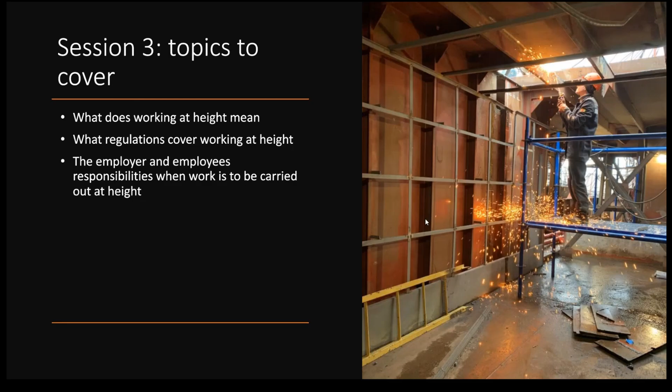So in this specific area, we will be looking at what does working at height mean? What regulations cover working at height? The employer and employee's responsibilities when work is to be carried out at height. Possible hazards and risks when working at height. How to control hazards and risks when working at height. Working on flat roofs and internal voids.

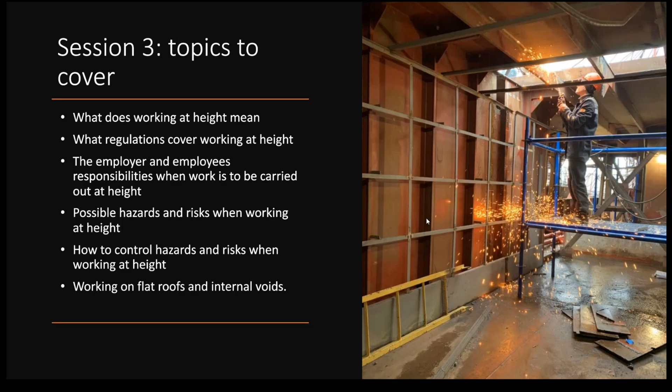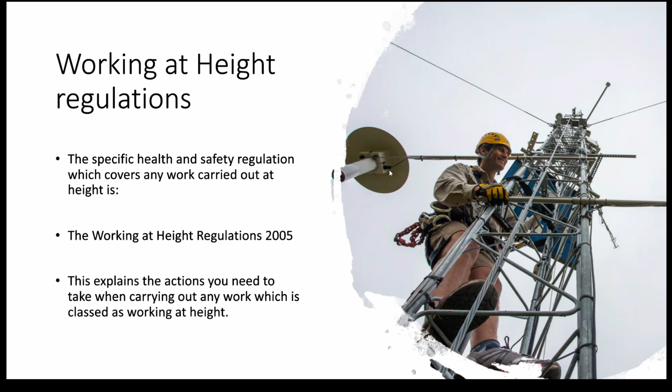So the specific health and safety regulation which covers any work carried out at height is the Working at Height Regulations 2005. This explains the actions you need to take when carrying out any work which is classed as working at height.

So what is classed as working at height? Working at height refers to any place where work is to be carried out, and if there were no safety precautions in place, you could fall a distance which could possibly cause you personal injury. So there isn't a specific measurement. It simply states that if you're working at a height, if there were no safety precautions in place and you fell, would you hurt yourself?

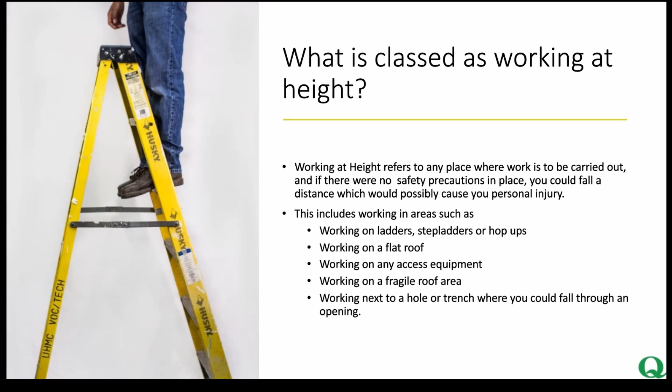This includes working areas such as ladders, step ladders, or hop-ups. Working on a flat roof. Working on any access equipment. Working on a fragile roof area. Working next to a hole or trench where you could fall through an opening. They are all classed as working at height.

Employer responsibilities relating to working at height. So the employer needs to make sure that when any work is to be carried out at height, it is planned properly so it's carried out safely. Supervised by experienced people. Any working at height is carried out by competent workers. Carried out using the correct type of access equipment. A risk assessment is carried out and control measures are put into place. The employer needs to do what they can to prevent anyone from falling.

So if you look at the image there on the left hand side, this guy has a harness. He's attached at 2 points, so he's clipped to the side and at the rebar at the top there as well. He's also got safety glasses on, gloves and a hard hat, and wearing a high vis jacket there as well.

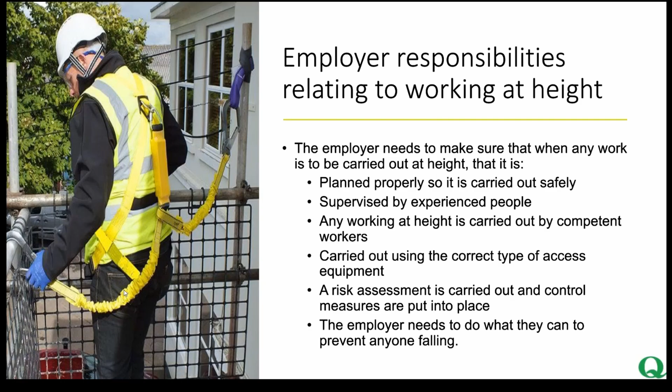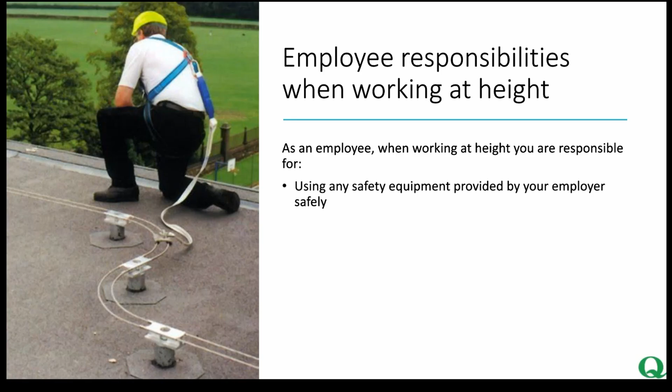Employee responsibilities when working at height. As an employee, when working at height, you are responsible for using any safety equipment provided by your employer safely. So if they provide you with a harness, as we can see in the picture there, you must wear it. If it says in the risk assessment and the method statement that to carry out that job safely you must wear a harness, therefore you must be wearing it.

Using the information gained from training and instructions to use safety equipment correctly. To follow all risk assessments and method statements. Reporting any safety hazards or unsafe working conditions to the appropriate person.

So if we think about working at height, things like the weather could have an impact. So if all of a sudden it starts to get windy, or that roof that you're working on has become slippy because it's raining, then it would be a good idea to notify your site supervisor or your site manager, because it could potentially mean that that surface is now unsafe to work on.

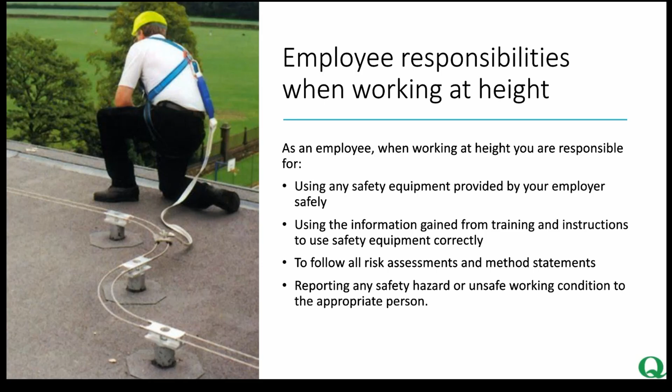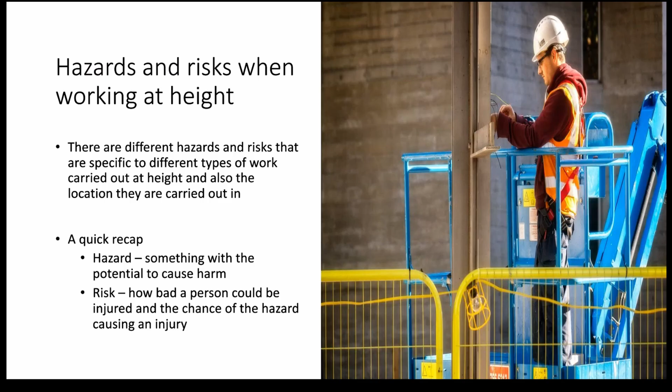So hazards and risks when working at height. There are different hazards and risks that are specific to different types of work carried out at height and also the location they are carried out in. So a quick recap. Remember, a hazard is something with a potential to cause harm. And a risk is how bad a person could be injured and the chance of the hazard causing an injury.

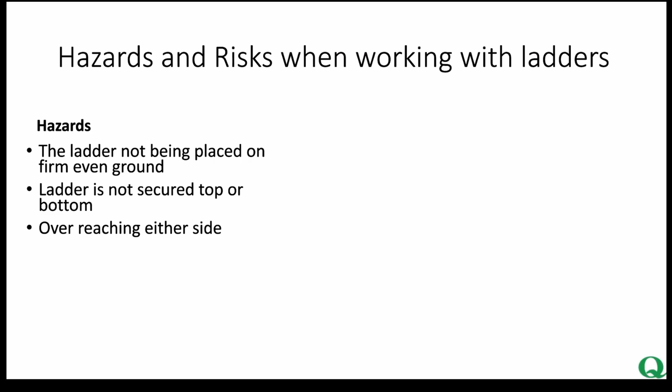So hazards and risks when working with a ladder. The hazards could be the ladder not being placed on firm, even ground. The ladder is not secured at the top or at the bottom. Overreaching on either side. Overreaching means if you are actually on the ladder and you're trying to reach for something that's just out of your grasp. Okay, that's overreaching.

Using a defective ladder. So is it the case that the rungs on the ladder are made out of wood and they're starting to corrode a little bit?

Using a ladder in high winds. Using near electric cables. Using tools and equipment. So if you're working at height and you're using tools and equipment, obviously the hazards are that they could either fall out of your tool belt or the case, or they could fall out of your hand, and they could strike somebody, a pedestrian that's underneath, or a colleague who's underneath as well.

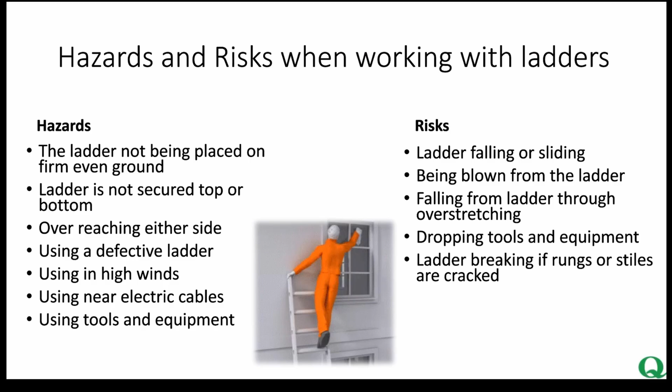Those risks: the ladder falling or sliding if it's on uneven ground. Being blown from the ladder if it's windy outside. Falling from the ladder through overstretching. So if you are overreaching on either side, you could fall from the ladder from overstretching. Dropping tools and equipment is the risk of using tools at height. The ladder breaking if the rungs or the stiles are cracked.

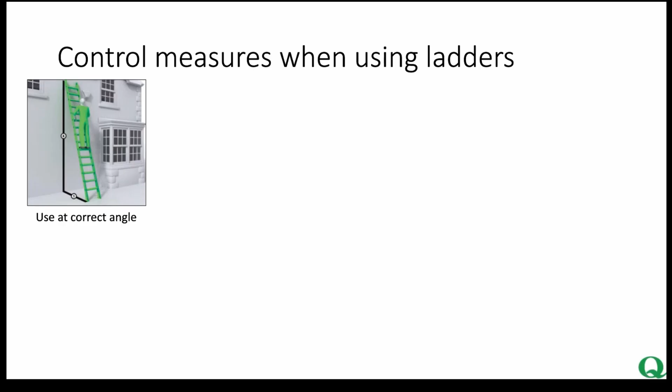So the control measures you could put into place to make sure that those ladders are safe to use. Use at a correct angle. Do not overstretch. Secure it where necessary. So use the ties at the base and at the top as well. Use standoffs. It would be a good idea to do some research and find out what the actual correct angle is for using a ladder. It can come up in an exam situation, specifically in the CSCS test. Used for access to a scaffold platform, it needs to be at least 1 meter past the platform.

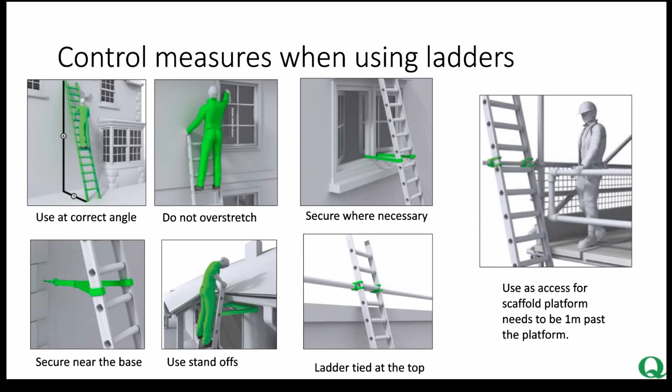Mobile towers. So mobile towers are a lightweight, mobile working platform. Hazards when using these include fixing a harness to the tower, being erected by untrained people, used on soft, uneven ground, not using outriggers when required. Outriggers are the legs that stick out from either side of the platform to give it extra stability. Not applying brakes when working on them.

Mobile towers, as you can see from the right hand side there, look like scaffolding, but obviously they can be moved about. They're on caster wheels with brakes applied to them. So think about the wheels that you might see on a shopping trolley or on a child's pushchair. They'll have brakes on to stop them from moving. If you haven't applied those brakes and you're working at height, that's hazardous.

Overloading the working platform. So those platforms would be suitable for potentially 1 or 2 people at a time. See the guidelines when you're erecting the scaffold, how many it can take and the weight it can take. If you overload that, it's going to start becoming hazardous.

Not using kick or toe boards. So kick and toe boards, as you see from the image there, that's the black bit that you'll see around the feet of the 2 people that are working there. Those kick and toe boards will stop any tools rolling off the side and potentially striking somebody underneath.

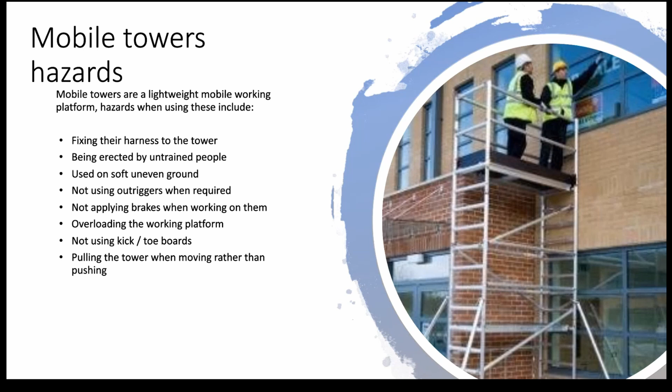Pulling the tower when moving rather than pushing. Not checking the tower and components before use. Using the tower in strong winds. And moving towers over 4 meters can tip them over. Not using the correct methods to access the working platform. And also using near overhead cables.

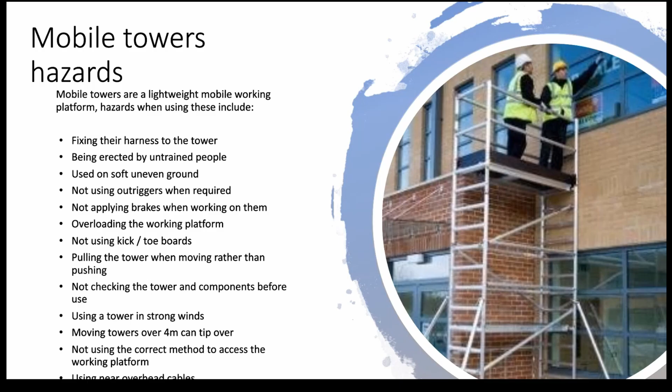So those risks. Tower collapsing because it was erected by people who were not competent. Items falling from the working platform as there were no toe or kickboards. The tower falling over when being moved incorrectly. The tower toppling over as no outriggers were being used to give a firm support at the base. The person falling off when climbing up the tower on the outside and not using the correct method.

Person falling from the top with a harness fixed to the tower may pull the tower over with them. Electric shock if the tower is used near electric cables. Someone falling from the working platform if it's moved while they're on it. And the tower moving or falling over due to being used on soft sloping ground and the brakes not being on.

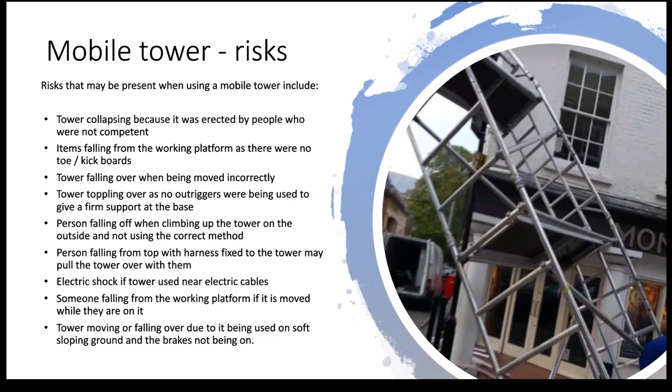So the safety precautions when using the mobile tower. All staff need to be trained and competent to use mobile towers safely. All working platforms need to be enclosed with toe boards to prevent materials and tools falling. Outriggers to be used at the base to increase stability, as stated by the manufacturer. Again, those outriggers are those legs that stick out from either side of the mobile tower to give that extra stability.

Only climb the tower using the specified method. So as you can see, the guy in the picture there is using the ladders on the inside of the tower, not on the outside of the tower. Take precautions when working near power cables, such as closing them down. So if you're working close to cables above you, it might be a good idea to have that area specifically isolated so you don't get struck by electricity.

Only use on firm, even ground. Work on the platform with all 4 brakes applied. And when moving the tower, it is safer to push it than it is to pull it.

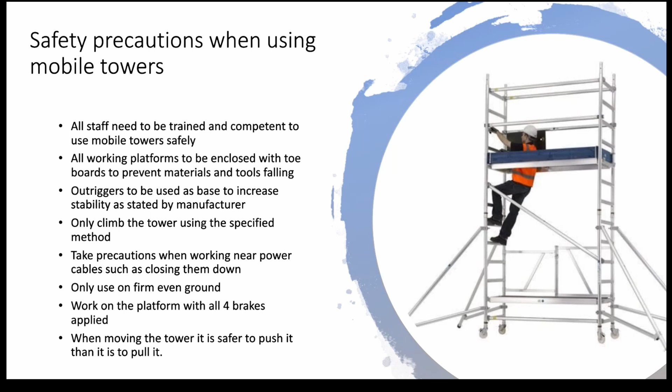Independent scaffolding is built with tubes and scaffold boards and erected by competent licensed scaffolders. So there is specific training that can take place and you can complete, called your PASMA training. And only those who have got PASMA certificates are able to put up scaffolding.

But common hazards would include not being built by a competent person, the material stacked dangerously or too heavy or left untidy on work platforms. So if you're working at height and you've got tools or equipment stacked, so whether it's toe boards stacked or different kinds of equipment stacked up at height, they can tip over the side. It's too heavy for that specific scaffolding. It's left untidy, so it can cause slips, trips and falls.

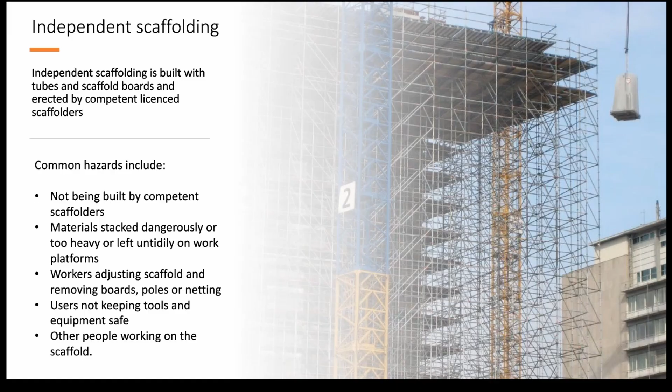Workers adjusting scaffolding and removing toe boards, poles or netting is going to be quite hazardous. Users not keeping tools and equipment safe. Other people working on the scaffolding are going to be hazards. So those specific risks: the scaffold collapsing if important parts are removed or not used. Materials or equipment falling from scaffold and hitting somebody. A person falling from scaffold if boards or guardrails are removed. A person falling if they're not using the correct PPE.

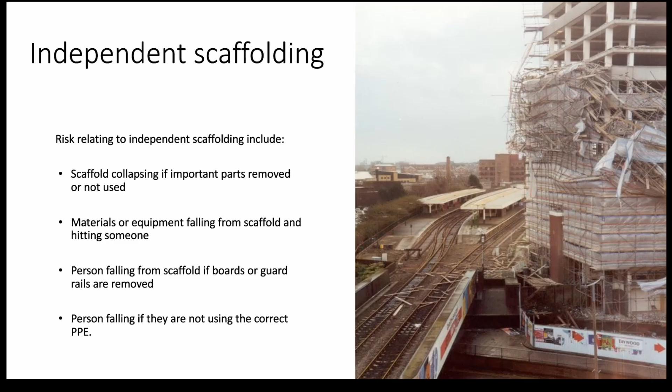So as identified earlier, the likelihood is that you will be harnessed on, you will be attached to the scaffolding. So if you do fall over the side, you're harnessed on and you'll only fall a short distance rather than hit the ground.

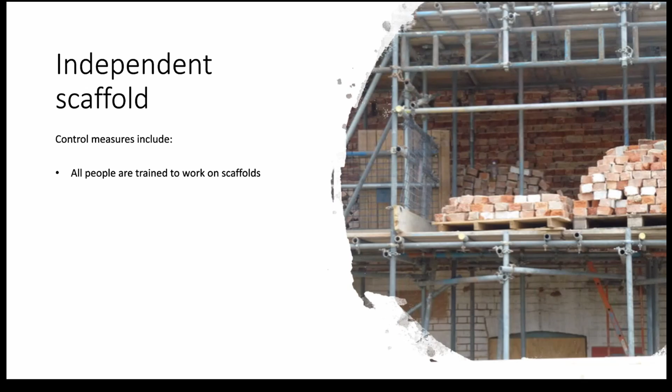So control measures when it comes to independent scaffolding. All people are trained to work on scaffolds. Scaffolds are only erected by competent scaffolders. All workers on scaffolds to wear the required PPE. Materials and equipment to be stored safely on working platforms, and netting and guards to be used. Scaffold is only accessed using methods provided.

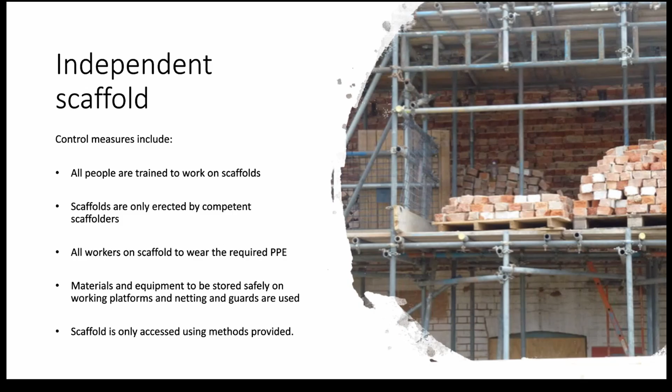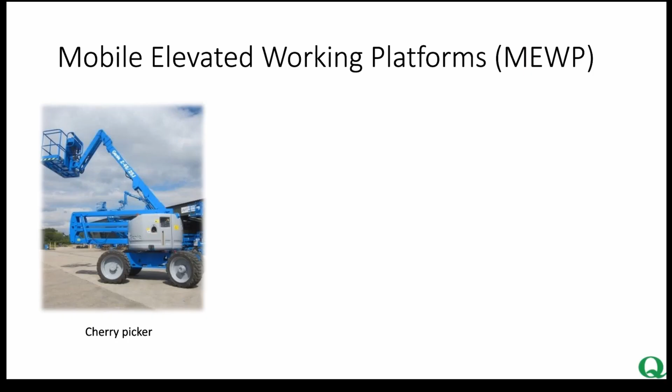We have mobile elevated working platforms, also can be abbreviated to MEWPs. They can be in subcategories, for example, the cherry picker, the boom lift, and the scissor lift.

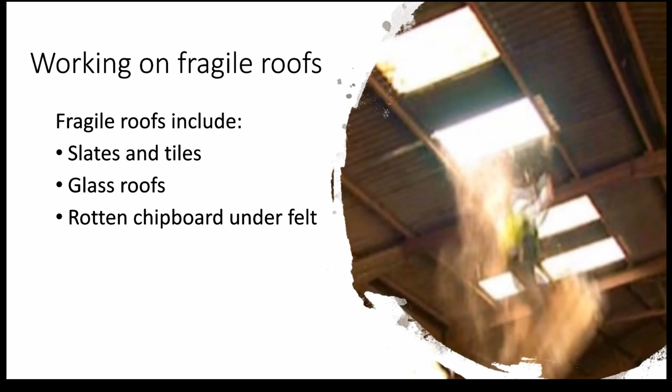Working on fragile roofs. That will include slate and tiles, glass roofs, rotten chipboards under felt, metal sheets that have rusted, fibre cement sheets. So safe working on fragile roofs. Avoid if at all possible. So in other words, could you use a boom lift? Could you use a cherry picker? So rather than stepping onto the roof, can we use a MEWP to access that roof that's going to be more stable and more secure? Can the work be carried out from inside?

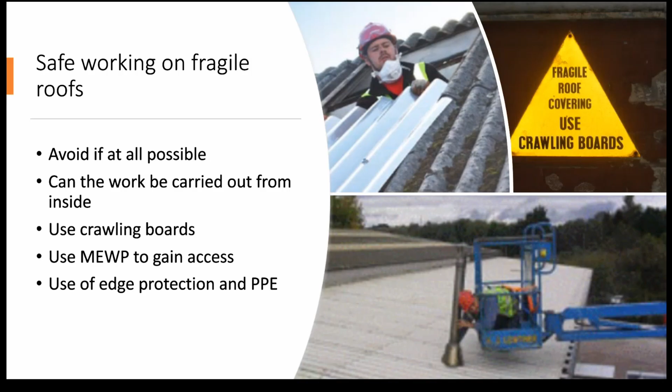Can we use crawling boards? So wider areas, a piece of wood that you can put on top of the roof that would distribute your weight across a bigger surface area to make it a little bit safer. As I've just mentioned, using a MEWP to gain access. Use of edge protection and PPE. So edge protection could be at the edge of the roof where the guttering would be. You could put a plank of wood that would stop anything or anyone rolling off the side of the roof. PPE, hard hats, gloves, goggles, harnesses. All work to be carried out by competent people.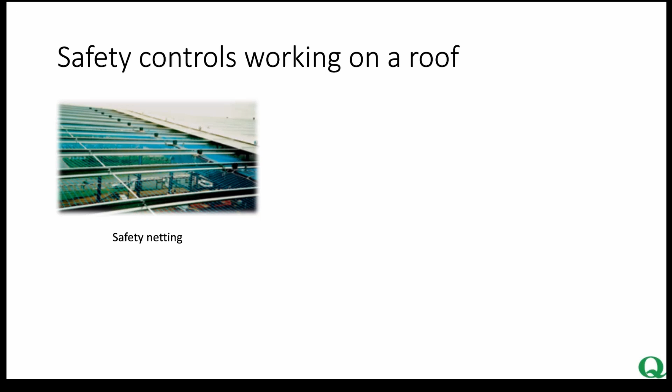So control measures when working on a roof. Safety netting. So the netting could be there to catch people, or be there to catch equipment, could be there to catch tools from striking somebody beneath them. Edge protection, as I mentioned before, the example I gave was wood, or we could have steel fencing around the edge of the roof to stop anybody or anything from falling off the side. Harnesses, lanyards, and access equipment should all be used when working at height, specifically on a roof.

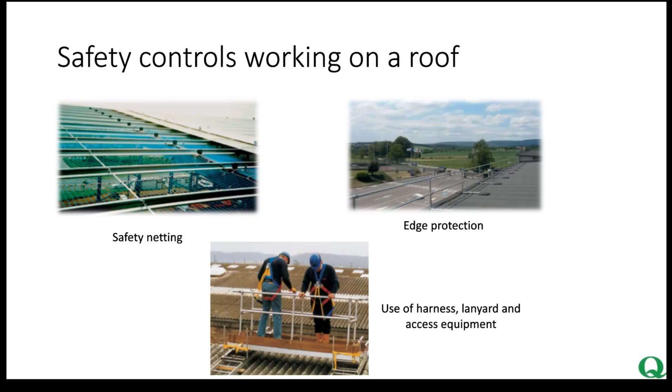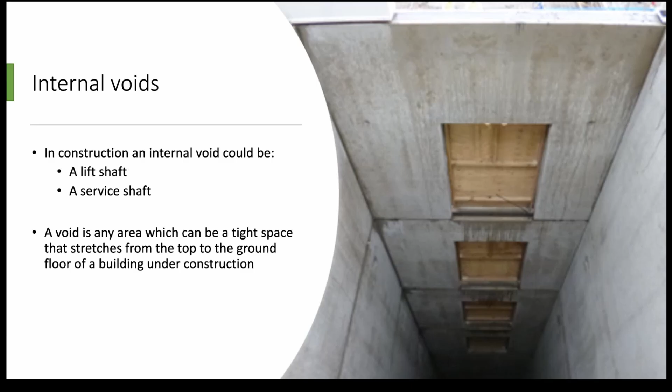Internal voids. In construction, an internal void could be a lift shaft, a service shaft. A void is any area which can be a tight space that stretches from the top to the ground floor of a building under construction. The biggest risk is falling down them. So safety precautions. All exposed entrances to be fenced off. Anyone working in a void needs training. All workers to wear harness and fall arrest equipment.

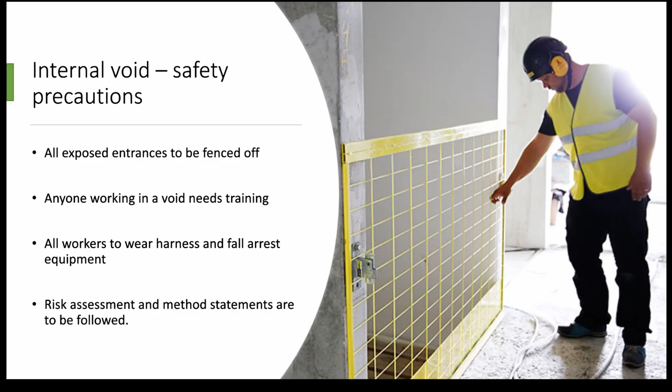Risk assessments and method statements are to be followed. So in those risk assessments and in those method statements, it'll identify all the risks, all the hazards, and the control measures in place for those who are going to be working in and around the void. So therefore, control measures would be harnesses, fall arrest systems. Only trained people who are able to work in voids should be working in the void.

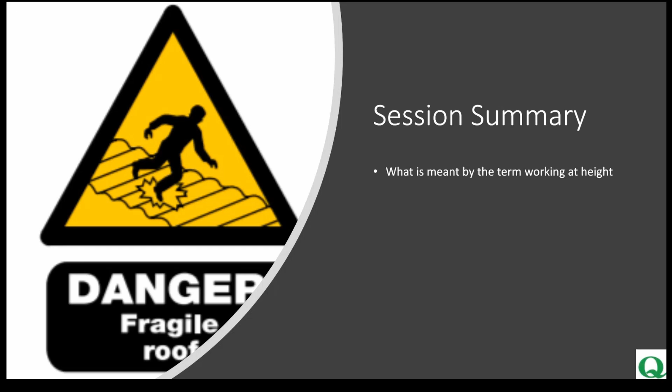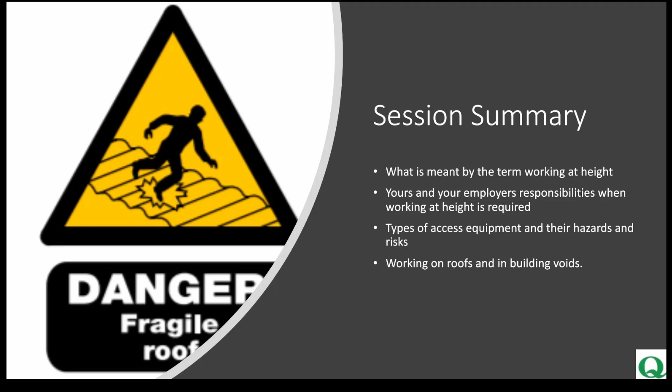Session summary. In the summary, we have covered what is meant by the term working at height. Yours and your employer's responsibilities when working at height is required. Type of access equipment and their hazards and risks. Working on roofs and in building voids. And that is the end of section 3.